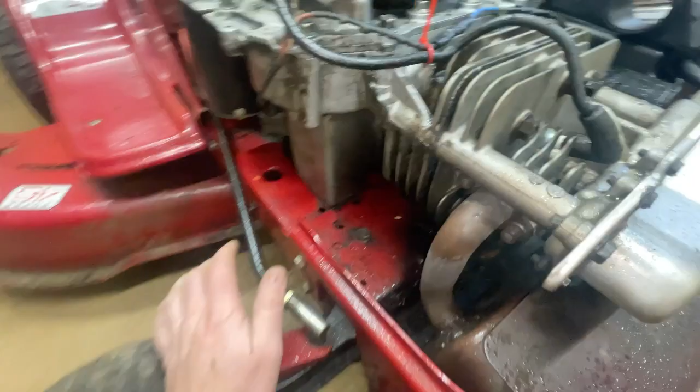Immediately when he dropped it off, I could kind of tell there was a little bit of oil and stuff right down here. I don't know if you guys can see it too well. So I'm kind of thinking it could be a head gasket. What has me concerned is when you crank this thing, it absolutely doesn't have any compression. So we could have something major going on, maybe in the cylinder head, maybe a push rod. Who knows? A valve guide, a seat cut loose.

Could be various things. Now I do know that if it's something catastrophic, I don't think we'll be rebuilding the engine. We'll see what my guy says about it, see how far he wants to go. But right now, we're just going to diagnose this thing.

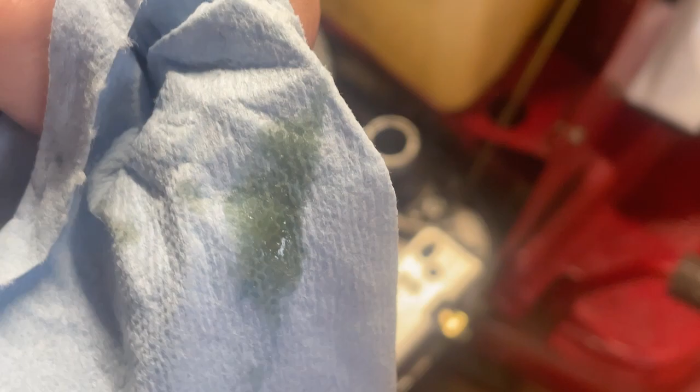All right, let's just check the oil. Oh, yeah, he just replaced that. So they did put fresh oil in it. You probably can't even see it. Take a look. Yep. Can't quite see any metallic flakes. I should have a white paper towel to do this. Not looking too bad. I don't see anything sticking out to me. That's not saying that there couldn't still be some in there, that's for sure.

We'll crank it over a couple times and recheck it and see if we get any metal flakes on there, just to see if we got any internal issues or not. The oil looks really good. 100%, guys, this is what scares me.

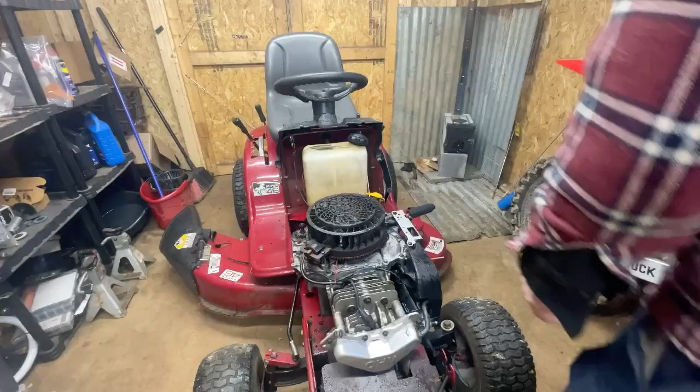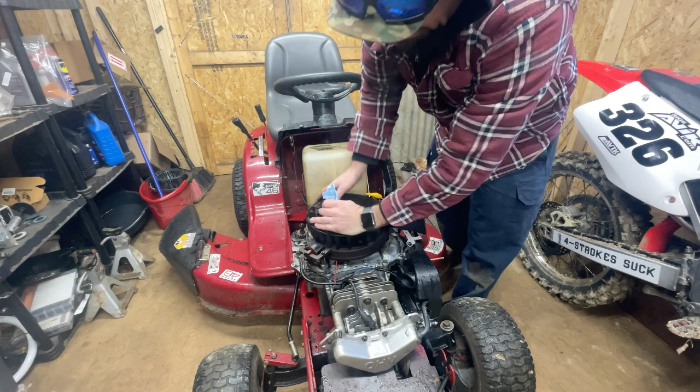As soon as he dropped it off, I kind of do this. In order to know you have compression and that everything's working properly in the head, a lot of times you can do your own leak down test per se, just cranking this thing over and listening to the suction when the piston's dropping down and when the piston's coming back up into that compression stroke. A lot of times, if there's just nothing there, that's kind of scary. But I do hear that suction in the carb a little bit, so it could just be that blown out head gasket with the compression down.

Now, I haven't pulled up the service manual on this. Unless you've done a ton of these engines, some of the stuff might not be in your head. I'm not 100% sure if this has got a decompression mechanism, but we will do a compression test for you guys, which I already know is going to be way low. First things first, we'll pull the spark plug just to make sure the connecting rod, nothing in there is broken on the bottom end.

But listen to this, guys. This thing just cranks over way too easy for me. Oh, well, we might have a dead battery now, guys. Appears that we do. Maybe I did leave the key on. I have to get the charger on it. All right, let's put the jumper pack on it. I'll crank it over for you guys. See that? There's just no compression there, it seems to me.

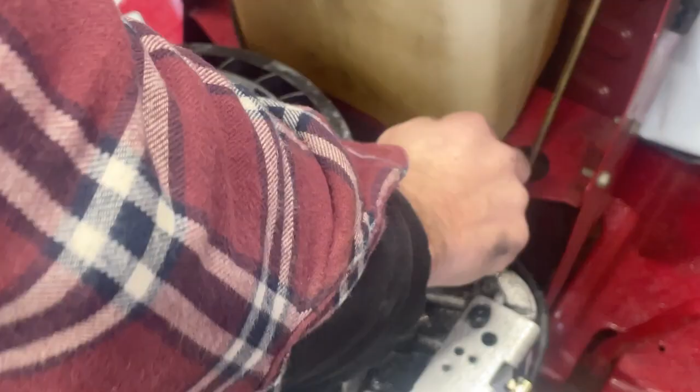All right, we're gonna pop the spark plug. See what's going on here. Read the plug, dude. That's what tells the story a lot of times.

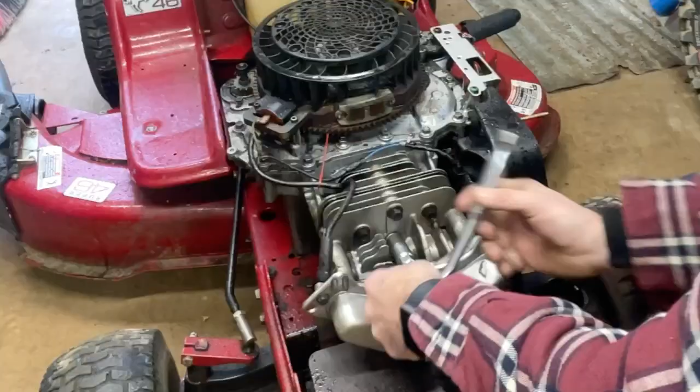Well, what do you know? They put a new spark plug in it thinking, I guess this will fix the problem. Nah, I'm kidding. But yeah, there's no runtime on that spark plug. They threw it in there upon trying to get this thing going, I guess.

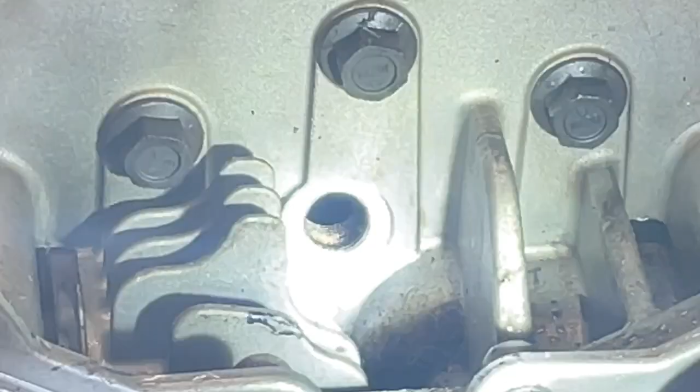All right, I'm not sure how well you guys can see that. You're not gonna see through my big head, but we're gonna make sure this piston's moving. And it is, so that's a good sign, guys. That is a good sign. Can I see that in there? Not sure how well you can.

All right, guys, I gotta fetch my compression tester here in the other shop, but the reason I wanted to check that, and I could hear in the carburetor that little bit of vacuum. Well, it wasn't a whole lot, but the reason I checked that is those Kohlers are notorious for losing the bottom end and the counterbalancer. So they're not the best engines in the world.

I think they're notorious for that counterbalancer blowing apart, and some of these Kohler Courage engines. So I just wanted to make sure there was nothing like a broken crankshaft or anything in the bottom end. Damn day, guys. Had the smoke rolling.

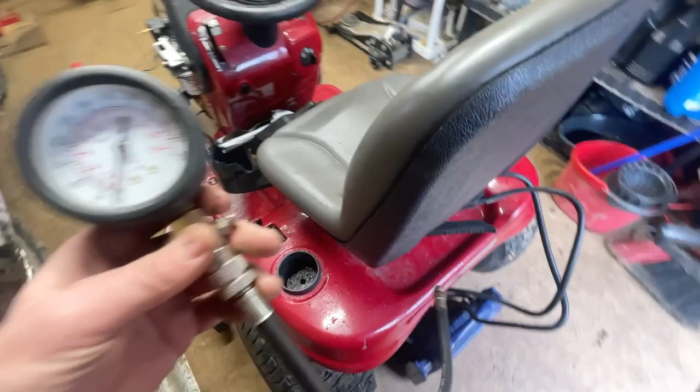So we got the compression tester here. So one thing I will say for sure, guys, is get in the habit of doing compression tests. When I do engine rebuilds and stuff, I got notes back here. I write down what my compression is. I do it on a lot of various engines, and then you start getting familiarized with what to look for, especially when you want to see the health and state of your engine, and then not to mention diagnostic purposes.

But yeah, dude, get in the habit of doing this, even though you may or may not really have to. If you want to get curious about the heart of the engine or the health of the engine, compression tests are a must. Compression test, and then diagnosing your 4-stroke, you would want to look towards a leak down test. On 2-strokes as well, pressure test, leak down test. Anyhow, all right, guys, we'll get this bad boy on here.

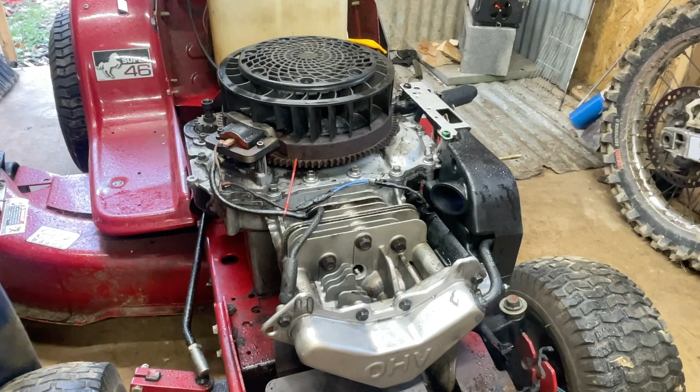Sorry for the background noise, a noisy helicopter up there. I get that all the time. I live right by a governmental base, I should say. But yeah, anyhow, it's nothing new to me.

Guys, I'll be really surprised if this thing makes any pressure at all. We'll see. Hopefully you guys can see that. I know I can't. It's nothing. Here we got something going on. We might even have a push rod or push rods jumped off on this thing. I have to open up this valve cover here and see what's going on.

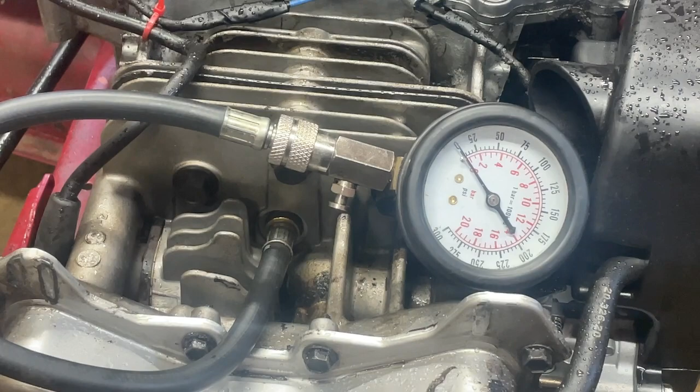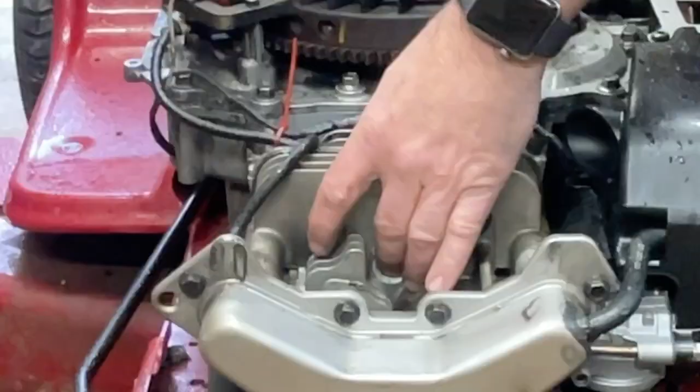I know it's pretty bad, but a lot of times I'll do my own kind of leak down test with just pushing my finger over it. And I know if we're not making pressure on the compression gauge, I'm just trying to feel if this thing's making any kind of vacuum or pressurizing it at all. I really want to get one of those bore scopes so bad. One of these days, guys.

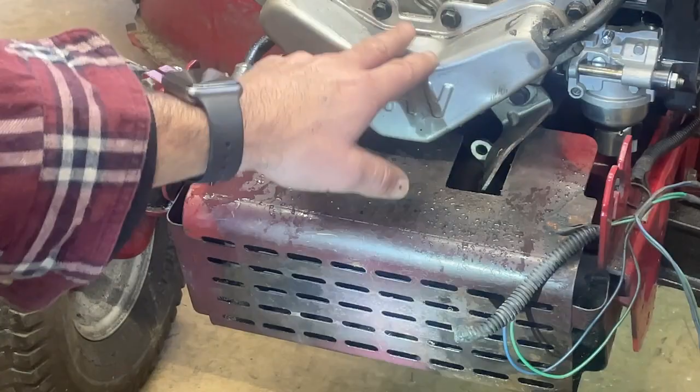All right, so what's really awesome about how they designed these engines, you gotta love it, is this shroud here will need to be removed because we can't get to the bottom bolt of this valve cover. So we're gonna go ahead and start taking this off.

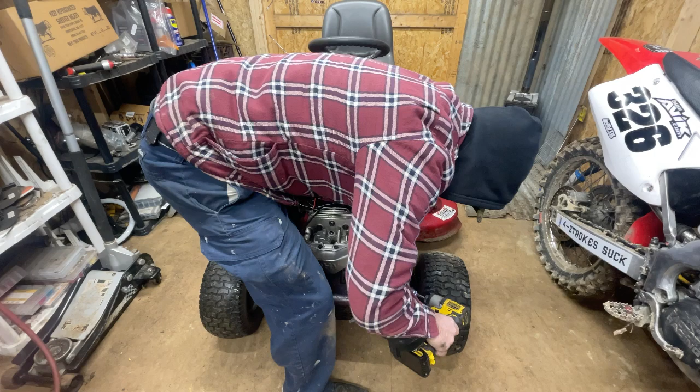Interesting. These are all loose. The valve cover flange there to the muffler has been loosened up too. So someone might have already been here and said, yeah, I'm not tackling this. Daggone cork gaskets are all notorious for leaking. To be honest, guys, when I put them on, I lather them up with Hondabond, and they never leak after that.

Dun dun dun dun. Make sure you guys can see. Yep. What do we think we're looking at here, guys? What are these? All right. Uh-oh, I'm hearing a lot of janky jank here going on. Look at this, guys. I guessed that right, guys. I really did.

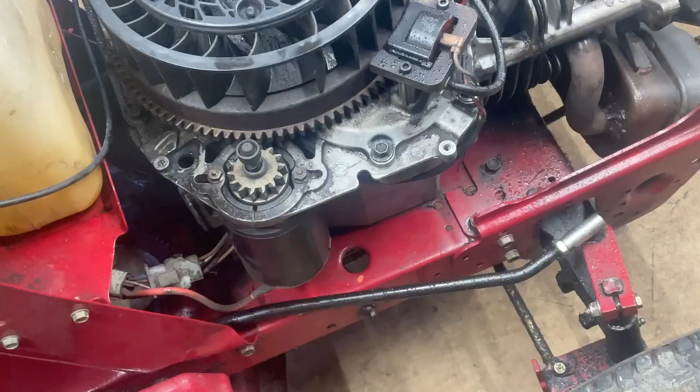Yeah. Painted it. Like, why design it that way? So we're gonna have to sneak this past here. I know my head's in the way, guys. Look at this. Exhaust is a little loose. Somebody was in here messing around with this thing.

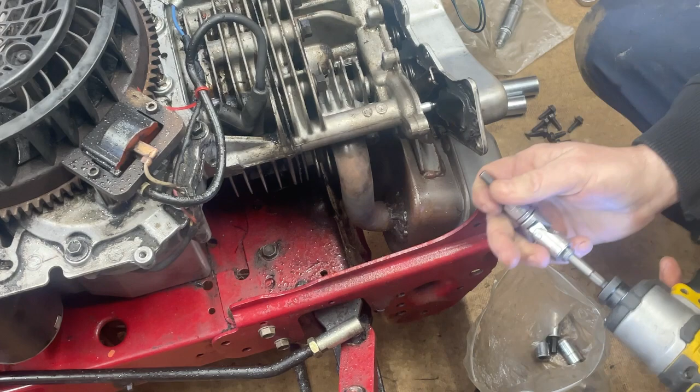We're gonna loosen these two exhaust bolts up, and then we should be able to shimmy that valve cover out of there. Get these valves put all back together, readjusted, and still think I've seen evidence of a head gasket leak. That should be enough to probably get her out of there now.

Oh yeah, I like how that one feels. They probably have the threads buggered up on it. The last guy, it didn't feel really good, I'll tell you that. Like, why? You know what I mean? Jeez, Pete. Yep, that's a problem for starters, guys. That's a problem.

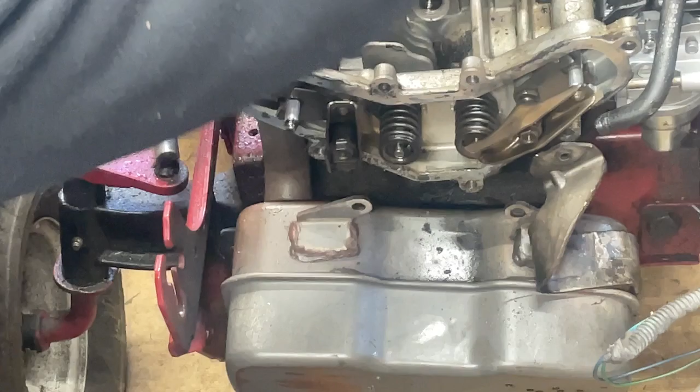That'd be one reason why we're not making compression. We can get this back on here, and I'm going to look up the valve clearances. I think they're probably 4 and 6, if I were to guess, but I'm not 100%, so we'll look it up. Kohler's pretty good with finding service manuals from my experience online too, guys, so we should be in good shape there. Yep, that exhaust valve is doing nothing.

All right, guys, I'm not 100% if this engine is notorious for it, but I have had Briggs engines where the valve guide will move on you and not allow the valve to open and close properly. I'm looking in there. It is protruding out a little further, but I'm not 100% when it comes to Kohlers, because I've never had that issue yet with a Kohler engine, but I have with Briggs & Stratton, where the valve guide will actually shift on you, and you can either ping it and press it back in, or you have to get a whole new cylinder head.

All right, looks like this is the SV600 engine. So let's look up the service manual specs for the valve lash. All right, guys, these valve lash adjustments are 7 and 5 thousandths. 7 thousandths on the exhaust, 5 thousandths on the intake. All right, we got 7 thousandths on this old girl. Oh yeah. Pretty good right there. Now, that should be pretty good. Slight resistance there.

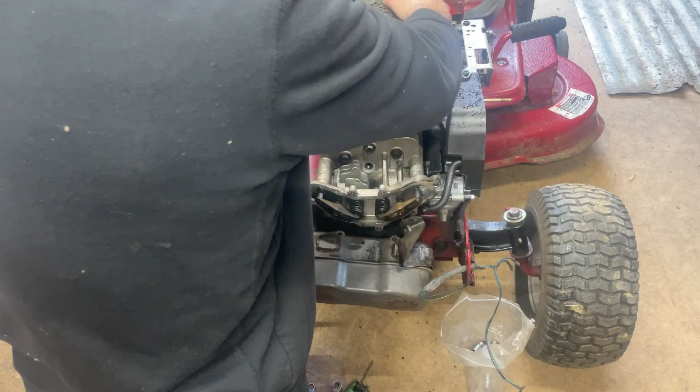We'll jump over to the intake side. Set that to 5 thousandths. I think I just saw the decompression mechanism bump. I could be wrong. Yep, I just saw it. So we're gonna make sure that exhaust valve's opening up all the way. Yeah, something doesn't, there we go. Yep, that was a decompression. So that should be open all the way down. So this should be loose. 5 thousandths on there. Definitely a little sloppy. Way too much, guys.

Now that's your adjustment screw, but I always just break them loose rather than risk torquing down on this. It's just the way I do it. May not be the way they want you to, but it's the way I do it, guys. And that out a little bit. And we're getting, it's a little tight there.

Uh-oh. Here's the ghost. The ghost of Christmas past just walked in here.

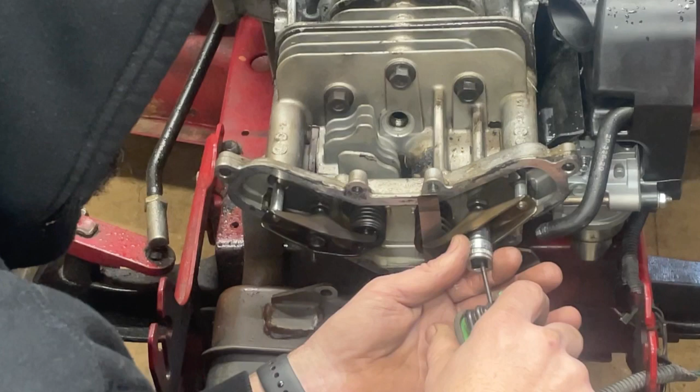All right, go a little bit tighter there. Slight resistance. That's how I like to do it, is just hold these sockets on these. I'm sure there's a special tool for it, guys. Got enough of them as it is for only using some of them a fraction of the time for the money you pay for them, you know. But that should be pretty good there, 5 thousandths. It's a little bit on the tight side, that's not too bad. Slight resistance. Let's see, guys, if it's changed anything here. Can definitely see the decompression mechanism working. So this surely has one.

All right, guys, I'm still a little skeptical that it may be a head gasket, but this is how I do my leak down test, is put my finger here, and right there's a compression stroke, and with my finger over it, it seems better. It's 100% better. Should be, right? Let's see what we get for compression now. I know the valve cover's off, and it might make a bit of a mess, but we're gonna see if this changed anything on the compression here. Yep, just gonna see if we get anything now. I'm cranking this thing over.

Look at that, guys. We should have around 60 psi. About 45 there. Looks like my jumper box is dying off here. So he does have a brand new battery. I think I just left a key on.

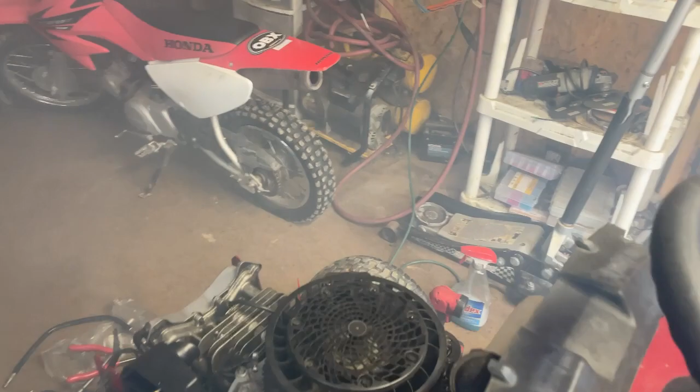All right, guys, as you can see, I smoked out the shop here. It's 100% got a blown head gasket. We diagnosed that. Got the valves adjusted, popping off and running, but it is smoking like crazy, as you can see here. But yeah, so we're gonna get the head gasket ordered for this thing and hope that everything goes as planned. It's got a brand new carb on there, so everything should be good to go when it comes to that. So let's get this gasket ordered up and go from there.

All right, guys, I think where we left off, we were at 45 psi on this engine. We had it fired up and running, and it smoked the hell out of the shop. We did the little spray test. Evidence can show that there is a head gasket leak on the bottom. With it smoking so bad too, I would also assume that there is for sure an internal gasket leak as well. All right, so you don't have to put it at top dead center, guys, but I always do. Number one, when I pull the cylinder, it keeps all the crap from going in there.

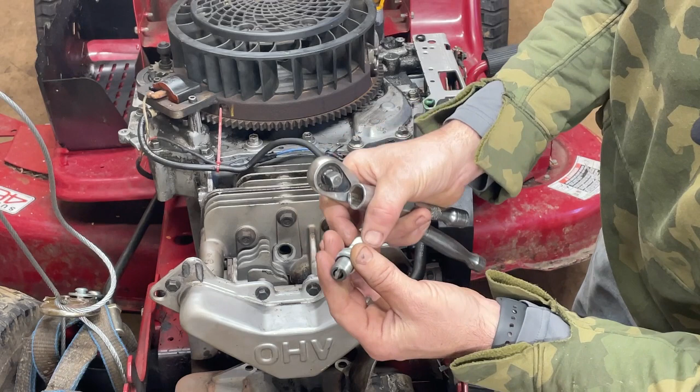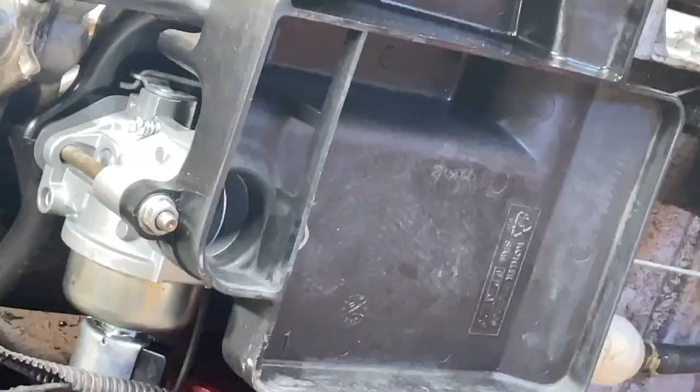See, for that little bit of fire on that plug, that's really, really black. So it's a good indication that there's oil probably getting in the combustion chamber. This head gasket job is generally pretty easy. It's a single cylinder. I would have probably stayed chugging along.

I try to keep some stuff in on common engines, common jobs, but only to a certain extent. It's really hard to do. I did have some head gaskets in for Kohlers. I actually got two back there and one inside in storage, but didn't have any of these. It's just all your air box.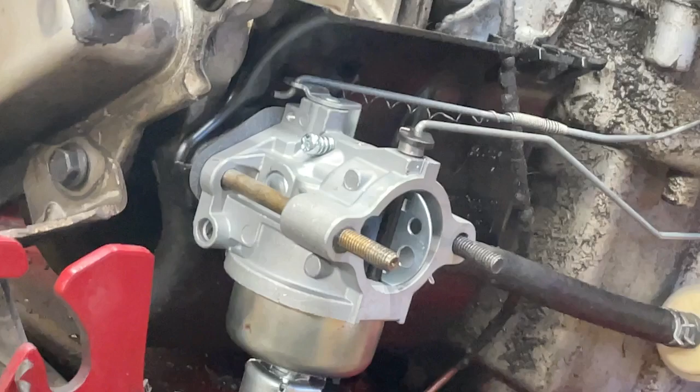So this guy was definitely messing with this thing. I don't know the exact backstory on it, but he surely was trying to get it going himself and threw this carburetor on here. That's why this carb looks real new, guys. Take a look here. Guaranteed to be a Chinese knockoff. Probably, I don't know, the original might have been a Walbro. I'm not sure. Oh, looky here. He's got this spring all jacked up. It shouldn't hurt a whole lot here.

Alright, so we're going to clamp off this fuel inlet line and work on taking this linkage off this carburetor. There, we got her. Alright, we got the gas tank out of the way. The anti-backfire is plugged up and grounded out right there on the side of the case. See, that's what you gotta love about some of these. You can't even slide the carb off without stuff being in the way. Kind of hard to mess that up. Looks like he did a good job doing it. Yeah, that's a no-name carburetor, Chinese carb.

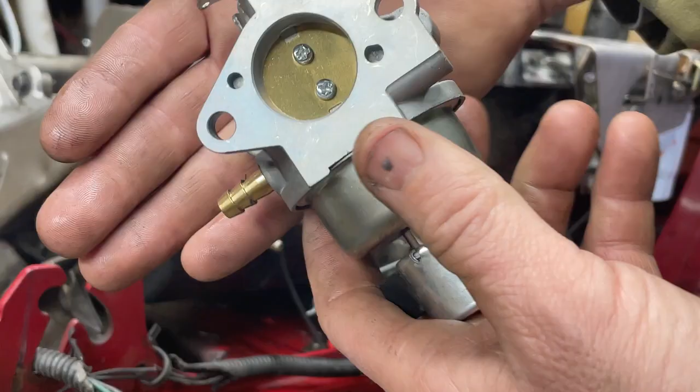One of these days, we're gonna try to rig up an electric winch, get like a Harbor Freight winch, and the only thing really stopping me is I gotta frame something out up there in the center of the shop.

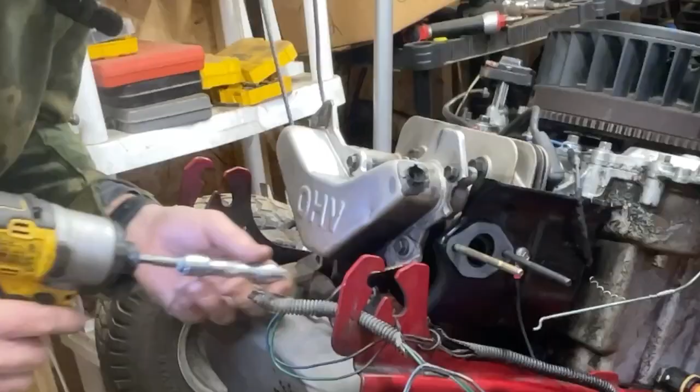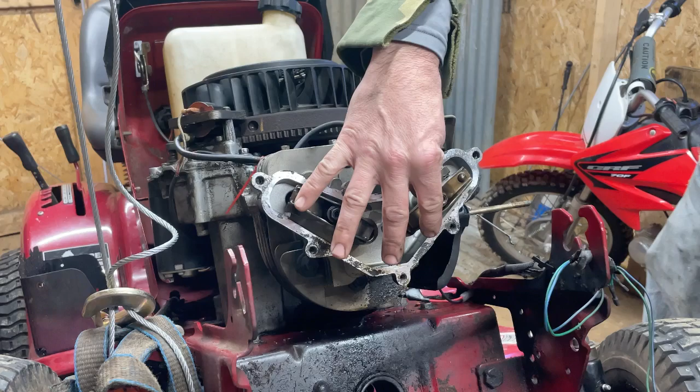We're gonna start off, guys, by removing the valve cover. I'm gonna put this thing at top dead center too. Put this thing at top dead center. Alright, guys, so that's on the compression stroke there. Not that that is real crucial, guys, so we're going to start cracking some of these head bolts.

I do have a Stens kit coming in for this. It comes with head bolts and all the gaskets, the intake or carb gasket, exhaust gasket, head gasket, valve cover gasket, and I don't just slap them on either. I lather them with Honda Bond, and they usually don't leak after that. Go ahead and crack these loose.

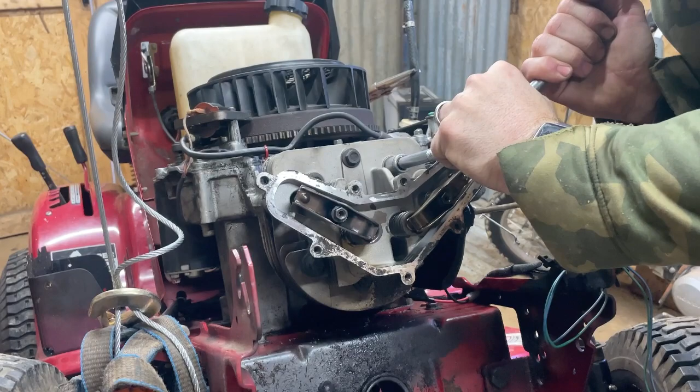As I was saying, I'm a big advocate of breaking these loose by hand, and I also always say that time is money, and you learn to do stuff more efficiently and faster. But yeah, that one's a little loose. Oh man, all three of these lower ones are loose. That's interesting. We'll check the head for warpage once we get it off. I'll probably resurface the head just a little bit. I ain't gonna take too much off, but we'll definitely make sure it didn't run hot and warp the head.

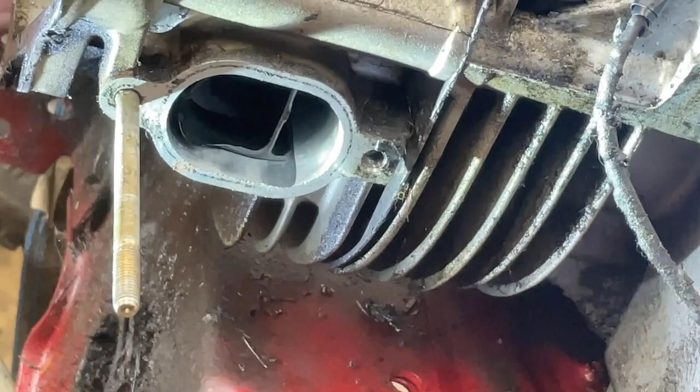I'm just going to let her lay and hold that bolt. That should be just fine right there. Probably should have been over here to show you guys removing that, but that little shim will come out right there. The intake port is really smooth. I might have to pull up the service manual. Everything looks good in there. Everything looks really good. I might have a little bit of a leaky valve there, guys.

Let's have a look at this, guys. Check that out in there. Right here is where you can see the evidence of all the oil. The other side's where I seen the leak and it was bubbling out. As soon as I seen that, I didn't go much further. I said, yeah, it's definitely a blown head gasket. So be holding on to this head when you get that last bolt off.

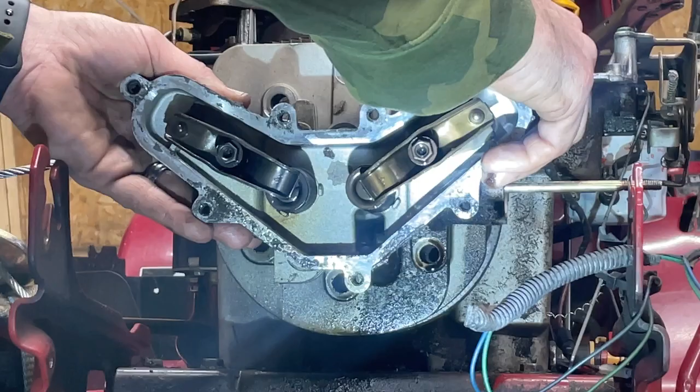All right, guys, let's see the carnage here. Hopefully you guys can see that. Take a slide right off those push rods. Nothing looks really damaged. That push rod did get a little boogered up, but I don't think it's going to affect anything. It's a little boogered up right there. We're going to clean them and mark those.

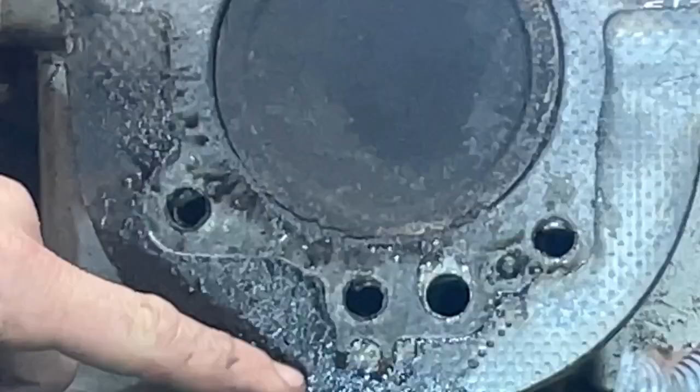Well, it looks like the gasket smashed over a little bit right there. That's not a good sign. Just looking for some failure points, guys. Looking like right in here and right here. Yep, right here.

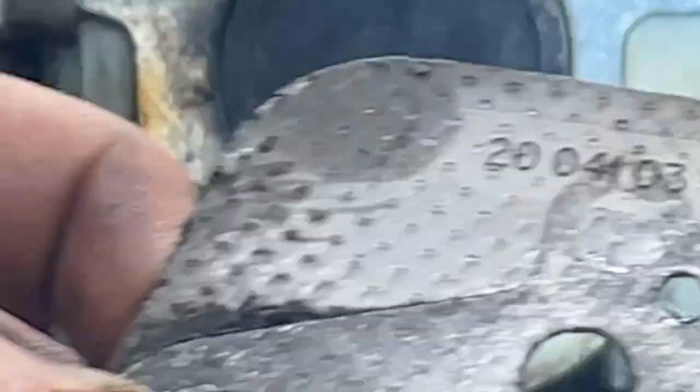Alright. Sorry about the heater, guys.

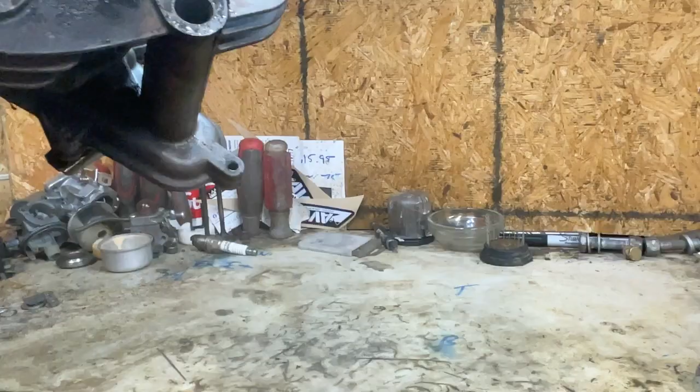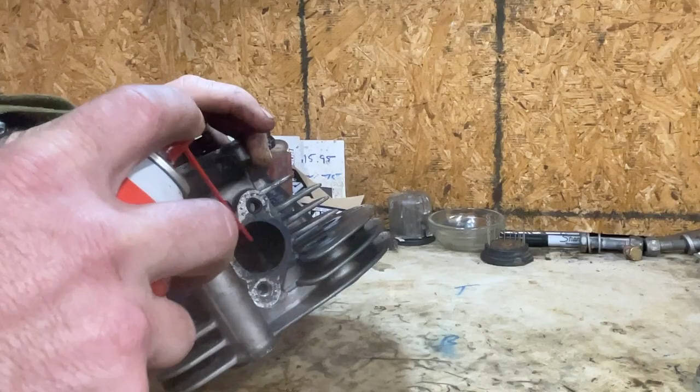Alright, guys, so we're going to leak check these and just see if they leak really bad from loading these up. See, that valve was leaking a little bit. So I will probably pull these apart and check everything out, because that one is leaking a little. And we're going to go into the exhaust side now. That one's not leaking.

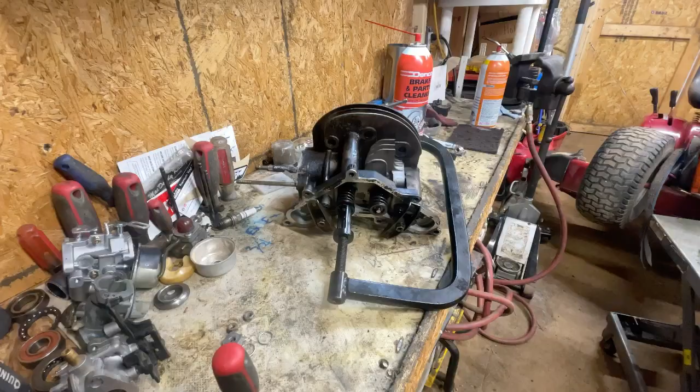I'm just trying to knock some of this stuff off first. I'll show you another thing I do here. What I'm going to probably end up doing is taking this in. I'll use my other grinder with Scotch-Brite pads. Alright, guys, so we got our valve spring compressor hooked up there.

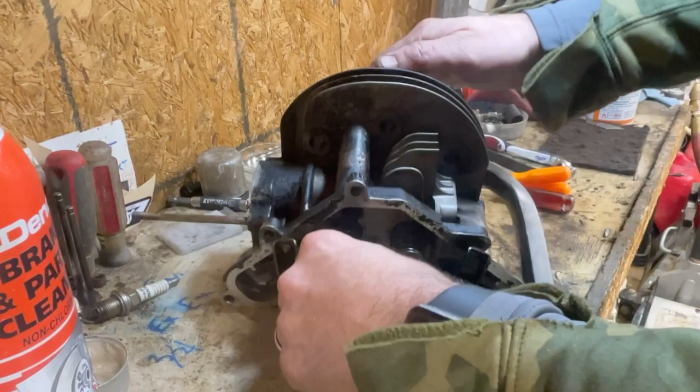And that looks good. We are going to work on dropping this valve. I checked it 3 times, it leaked all 3 times. So we're going to drop this valve out here. Have a look. Just take that out right there. I like the cup, just in case anything likes to slip off,

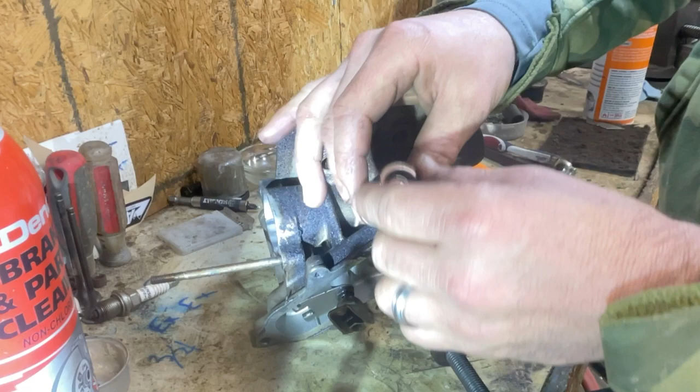because luckily I have a local guy that is generous enough to help me out one time. But yeah, I've had one of those keepers go, I think that was on a Briggs, I can't quite remember. And I really needed to get the job done. Showed up there, and the guy was more than glad to help me. Went out in the yard and helped me pull it off a mower. And it was neat that he helped out.

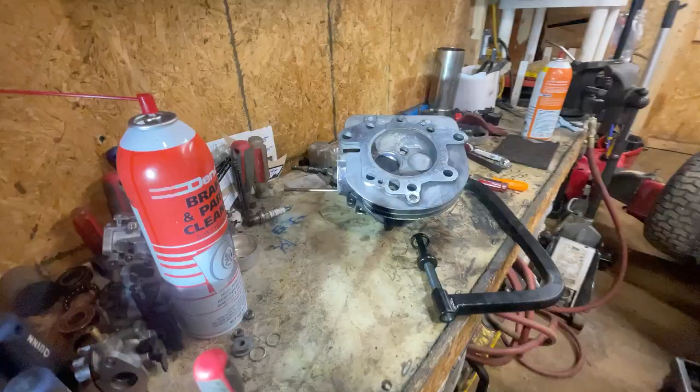Alright, there's a look at that valve. Get in there and clean all that. Looks like we could probably get away with not getting a new valve. It's got some life there. I think I could relap that in. I'll show you what I like to do to these valves to clean them up. Really doesn't look too bad in there, guys.

So I'm going to wire brush, spray this out a little more, and then we're going to get our valve compound out and start seating this valve in. Actually, we'll clean this valve up first back here, and then we'll get in here and seat it in, get some valve compound on it, do some really good cleanup, and drop it back in there and see if it passes the leak check.

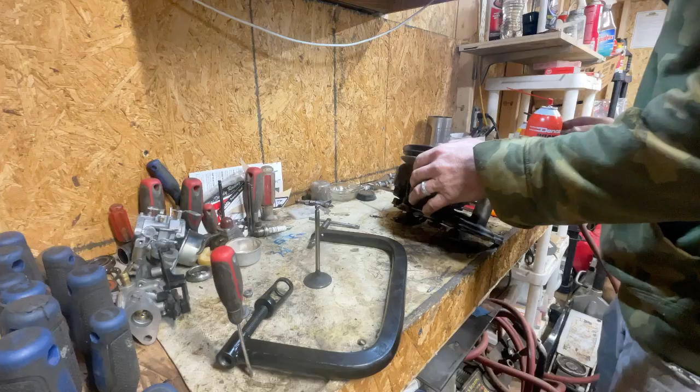Alright, I just like to chuck the old girl up in the drill. As long as your chuck and everything's not bent, it's a good way to tell if you got a bent valve too. That looks really good. I'll take this like this. And that's pretty good.

Alright, now we'll get our valve grinding compound out, start seating this in. My little suctionator cup, for lack of better terms. Spit on it though. So on there, just to try to build some suction. And sometimes I'll even chuck the drill up on here. See? And you can just use the force of the pressure of your hand.

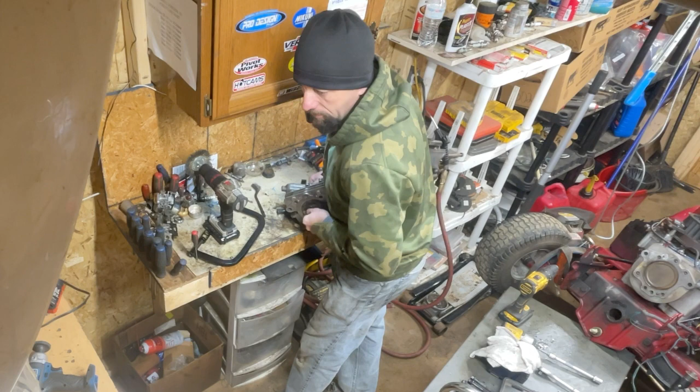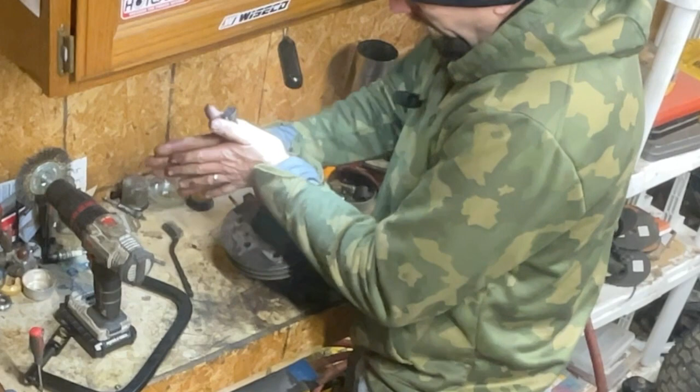I'm not sure how well you guys are seeing that, but I'm just pressing against it with my hand and spinning it on the other side. If I get tired of the suction cup not really doing its job, it spins easier. Looks pretty good, guys. Alright, we'll see how this works out, guys. Hitting it live.

Excuse me. You don't want it too tight either. You want to be able to work that spring around to get this keeper in there.

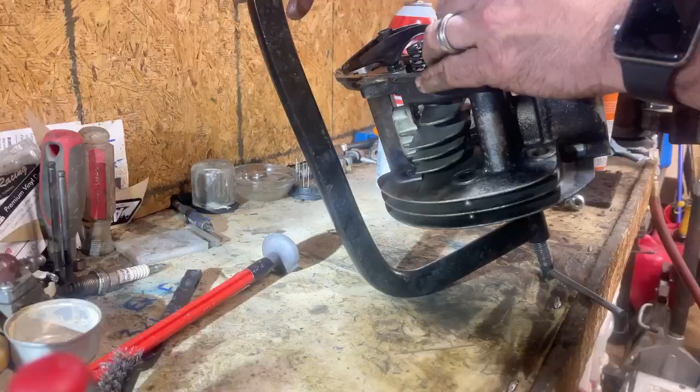Alright, guys, sorry about that. I did get a phone call. And right after that, I dropped it in and didn't have you guys watching.

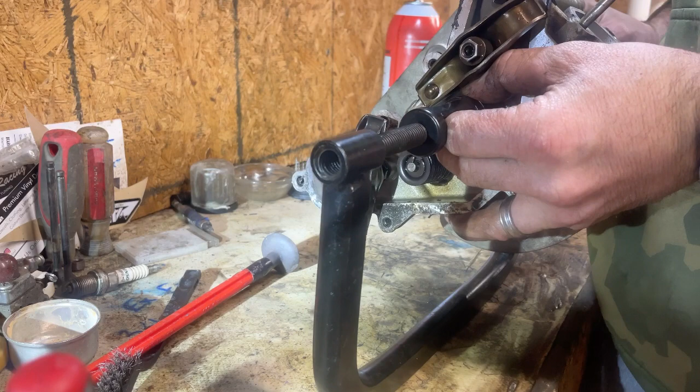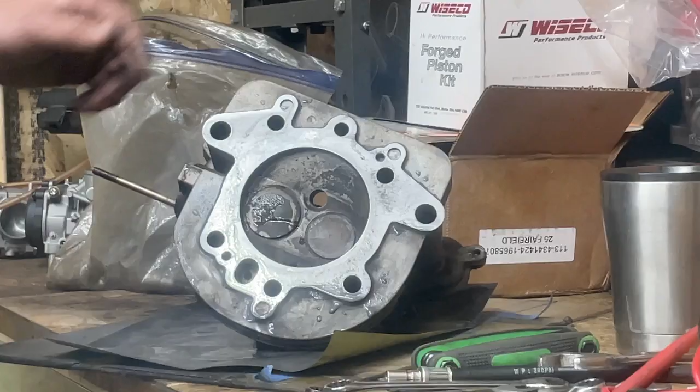A little tricky sometimes, but I was kind of caught up on the valve itself. And it kind of jolted down into place. I always work the valve a little bit. Make sure you're not going to have any... Usually I would have this taped down, but... Really cleaning it up nice, guys.

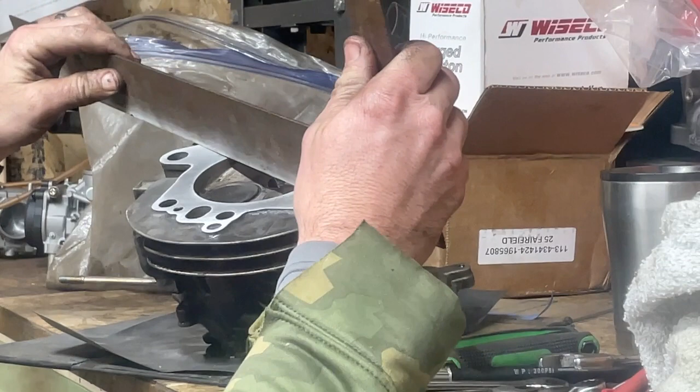How to check for warpage: you get your feeler gauge out and pretty much just run an X and make sure you're not seeing any daylight, which is really easy to do. If it's warped, you should be able to tell. Straight across that way. That's sitting so flush on there, I can't even see through it. And of course I have hit this pretty hard on the surfacing glass there.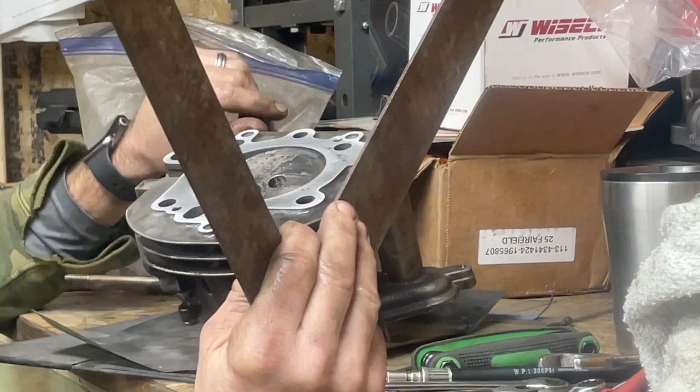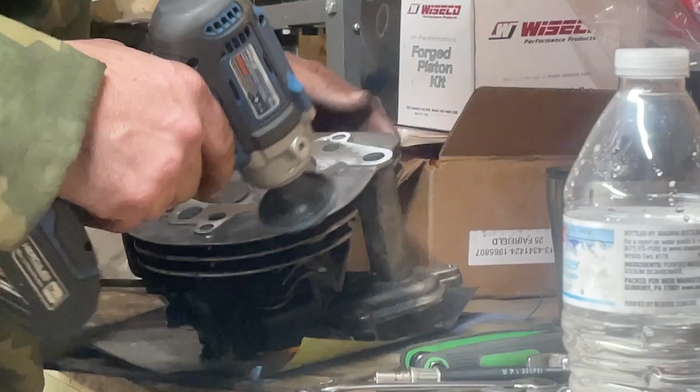And our leak point was down on the bottom here. I think everything's looking sweet. Looking good. Real easy to check for warpage. Don't cut corners. Guys, I've said it once and I'll say it again. Spend the extra time on mating surfaces. For sure, guys. For sure.

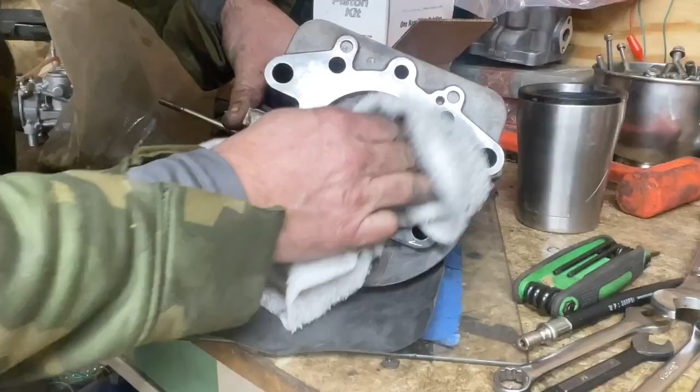Alright guys, I'm going to go in here and clean up this combustion chamber inside the other shop in the basement, and clean all this up off camera. And what I use, if you look at one of my last videos, I like those Scotch-Brite pads, and I put it on my grinder. They work really well for cleaning stuff up.

Alright guys, I just wanted to show another way to check to see if you've got any leaks in your valves here. So I'm going in the exhaust side here with compressed air. Nothing. As we checked before, that wasn't leaking. Guys, I'm not going to lie, I did have to drop this valve back out. And it was leaking on the inner portion there. We just lapped it a little harder, and it did stop the leak.

No leak whatsoever. I could blow compressed air in there before I put that water in here, and I could feel that it was still leaking. So we cleaned up that combustion chamber pretty good. I got my gaskets in now, so we're all but ready to slam this thing back together and hope that solved our problem with smoking like a chimney. So we're gonna find out.

All right, guys, we are back at it here. I got the OEM cylinder head gasket kit right here. It's a Stens 055-016, intake push rod and exhaust push rod.

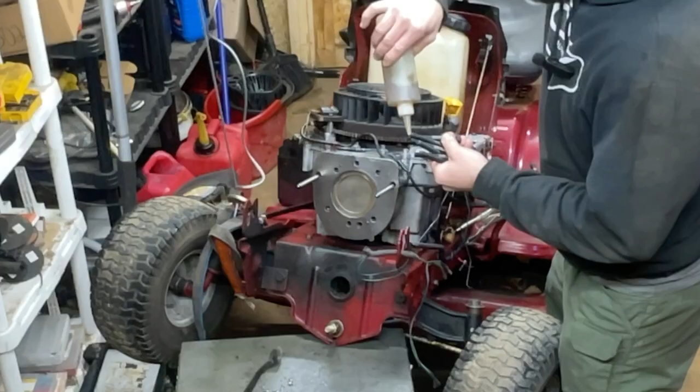Alright guys, I'm just going to give these a dab of oil. So cold morning at 22 degrees. And I'm going to start that one in just to hold the cylinder head in place. And I'm going to come up here and do the diagonal bolt. I'm really anal once I get my gasket on. I don't like moving stuff around. I like to seat it in place and kind of keep it there now.

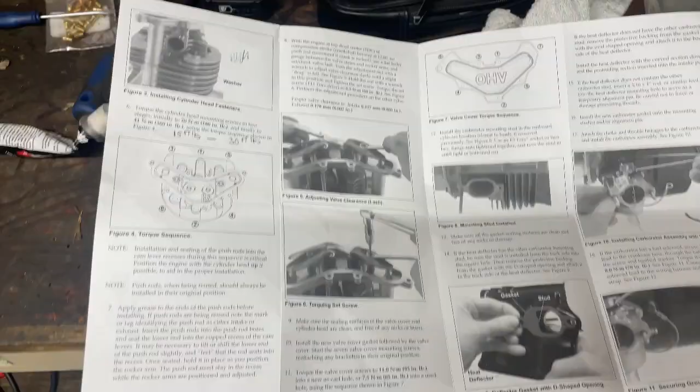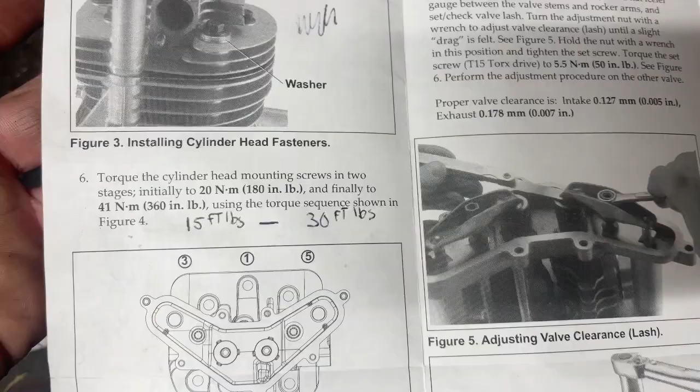Alright, Kohler gave us these awesome instructions. Valve clearances, everything in here. Torque down pattern. So it is 180 inch-pounds in 2 segments to 360 inch-pounds. And I went ahead and converted it to foot-pounds for you guys because that's just the way my brain likes to work. And there is the torque pattern. Just like any other 4-stroke cylinder head pretty much. Alright guys, we got our handy dandy Snap-on DR2 7000. I'm kidding. This is a good old Harbor Freight.

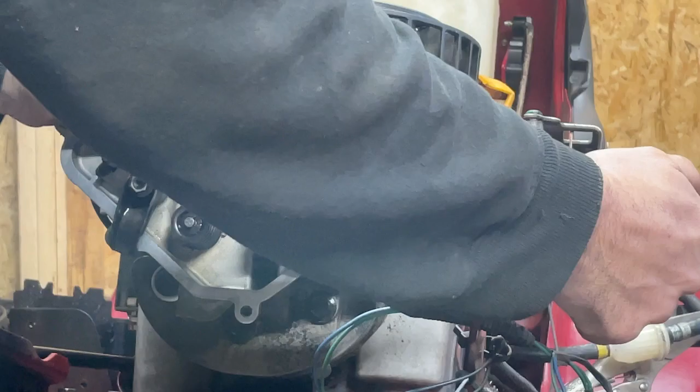Alright guys, we're going to do 15 foot-pounds first here. You start getting close as you move around the cylinder head. Sometimes you actually will bump the first stage as you start to lock this head down, like that right there. This might not be the exact torque sequence, but that's how I do them all.

Alright guys, we're going to hit it again. 30 foot-pounds. I probably want 30 and a half to close to 31 actually though. And the reason I did that is because I got an extension on here, guys. Nice and easy. There we go.

You heard my elbow go before the freaking torque wrench. It's like that. Was that the torque wrench? Nope, that's your old ass elbow there. That's funny.

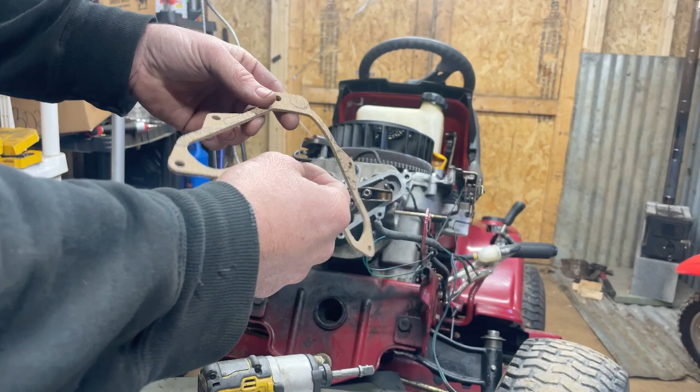Alright guys, we already have the surface cleaned up, as you can see there. We'll wipe it down one more time. And then they have the cork style head gaskets that are notorious for leaking. They all leak. But what I like to do, and I'm going to do it off camera just to save a little time, is lather this up with some Honda Bond. And yeah, they usually don't ever leak after that.

At least I haven't had one in a few years come back to me leaking. So that's what I like to do. Do it how you want. You can just slap this on here with clean surfaces, or you can do it the way I do it, which, like I say, if you don't want it to ever leak, use Honda Bond.

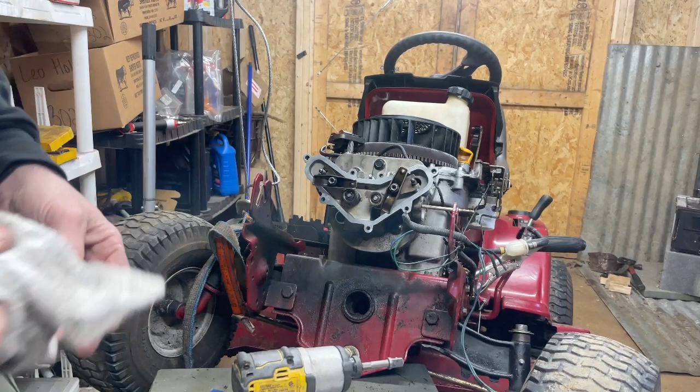Alright guys, I can see some smudging on my surfaces even though I cleaned them. I like to wipe them down one last time. It's definitely a lot more time lathering this thing up with Honda Bond. And you make a mess on your hands too. But alright guys, if you look closely, you're going to see that I have a Band-Aid on. And I'm just...

So there's a little bit of a broken bracket here, a broken piece on the valve cover. And I'm wondering if it ain't leaking oil too bad, because I think it probably will seal off. That's why I'm not quite putting this up here yet. We still got to adjust these valves. But I don't think it's going to break or leak. It's just something I'm going to have to test and make sure it doesn't leak.

My apologies. Alright guys, so I'm going to do this off camera, but now that I'm at top dead center, we should be able to adjust both valves and get them done without spinning the crank around and opening and closing valves. So I'm going to do that off camera real quick, and we'll be back in here. Remember, it's 7 and 5, guys. 7 and 5 thousandths. Alright guys, so we got everything adjusted there, 5 and 7 thousandths.

I'm going to rotate this over. It does have the spark plug in it. Should show me that it's got good compression. We just want to make sure everything in these internals is operating properly. There's a compression stroke. Feels pretty good, guys.

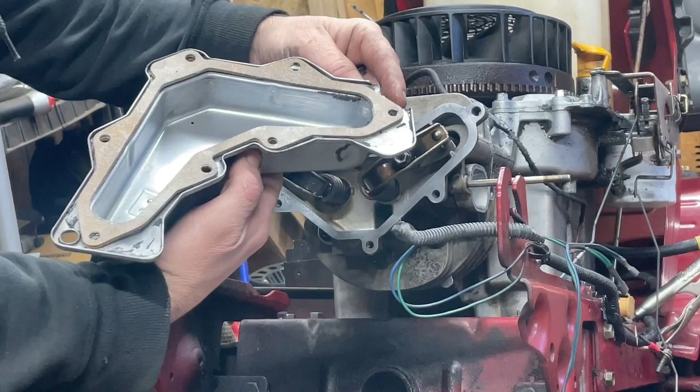Feels pretty good. Alright guys, real quick, just don't forget to lubricate the top of your push rod. You already seen we did the bottom. And then we're going to do the top of the valve. Same thing over here, and the top of the push rod. So guys, again, this is broken, so we're going to hope it doesn't leak. I didn't notice that. Alright guys, let's get this valve cover bolted up. And I'm really hoping I don't have a leak from this cracked piece over here. I think it should seal up, but if it leaks, we'll just have to get him another valve cover.

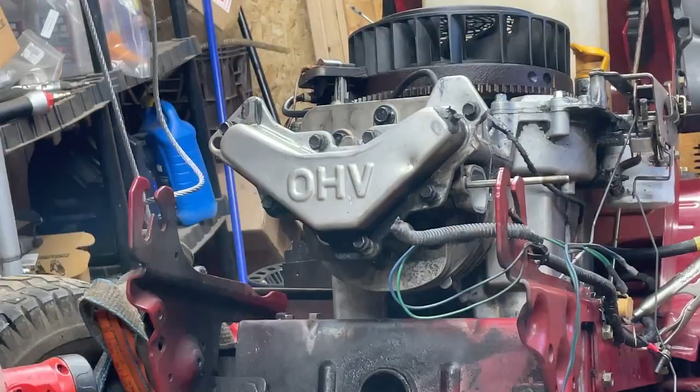Crisscross pattern, guys, really easy. I usually just snug them up by hand pretty good here until they feel pretty decent. I'm going to wait on the ignition coil because I am going to pump some oil around this engine, and we're going to remove the spark plug back out real quick, guys.

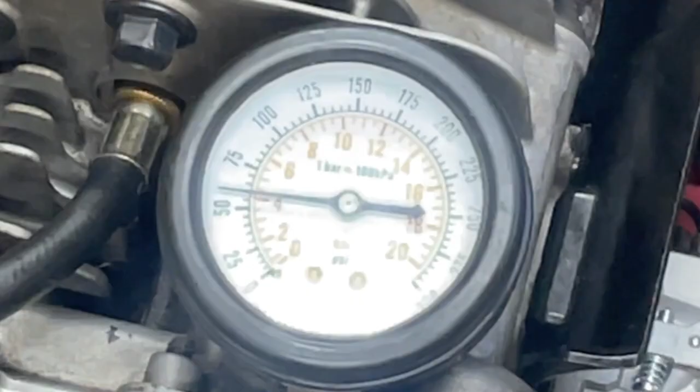Alright guys, I don't know if you can see that too well. Turn this way a little bit. Let's just see what the compression gets up to now. We have this thing just about ready to fire up. Just kind of curious if we hit around our 60 psi, which I think we should. And it shot up there rather quickly too, so that's good, guys. I'm not gonna let it run for real long, guys. I'm just gonna see if it pops off. We're gonna look over some stuff and check for oil leaks and everything, that's how I always like to do it anyway. So here we go.

Well, she's not smoking the shop up now, guys. A little bit of a rough start there. I think that's external. A little bit of leanness coming from the carb there. Well, that's wide open, so it would be on the leaner side of things, and it's cool and cold. These things are probably jetted for more warm weather because we don't mow grass in the wintertime, right? I'm gonna look things over, guys, but hey, it is not smoking. So that's a good sign. Get in here and take a look.

All right, guys, she's running pretty good now. We had a crankcase leak. Someone had a bunch of the bolts loose in the front of the crankcase, so the engine was pulling a pretty bad leak, and we found that issue. And it's running good, guys. All right, guys. Now it's time to take 5.